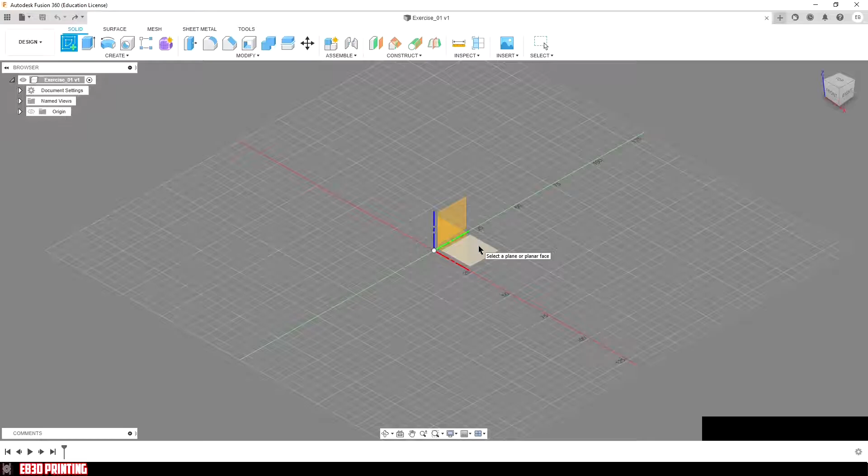So let's hop back over to Fusion 360. We're going to click Create Sketch and choose this XY plane, or top plane, whichever you'd like to call it. We'll click Create Rectangle, change it to a center point rectangle, and select the origin. We'll type in 100 for the length and 63 for the width, then click OK.

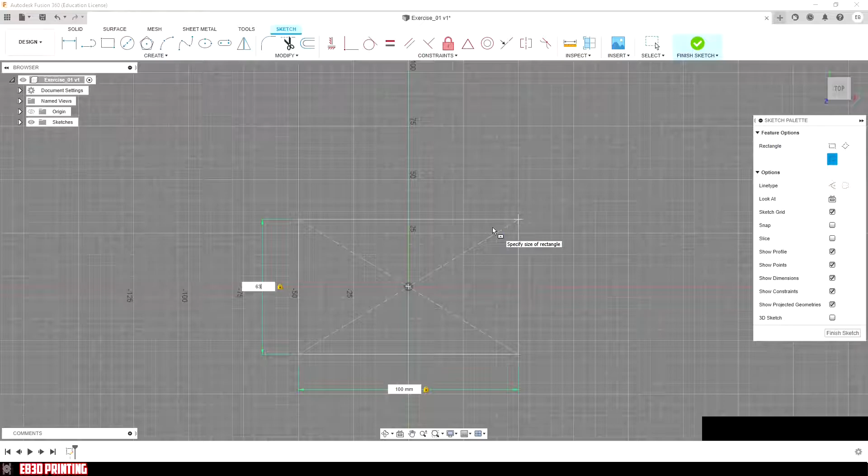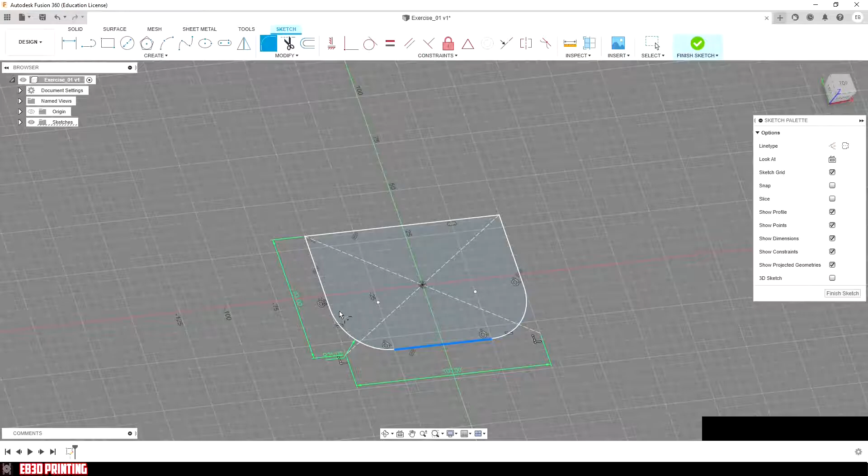Next, we're going to put two fillets on here. We'll select these two lines, then these two lines, and change the radius to 25. We'll make sure two lines are selected so it's tangent with all four corners here, and click OK.

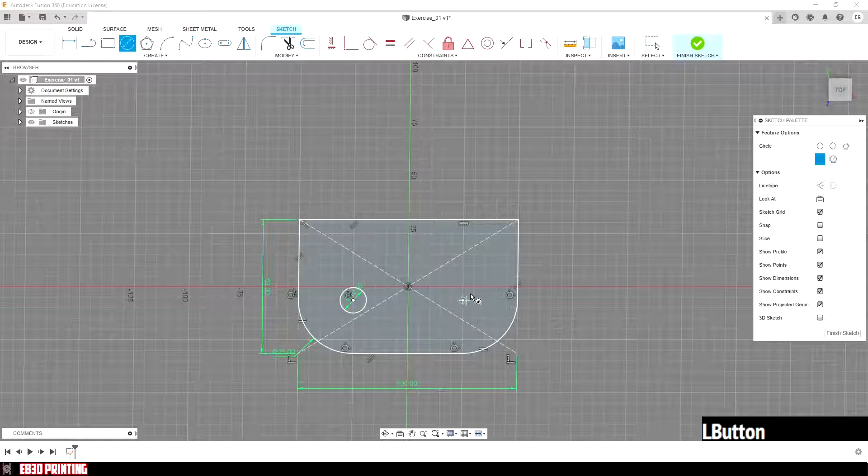Next, we're going to put our two 12 millimeter circles in. These are concentric with the fillets, so we'll type in 12 here, right click, repeat center diameter, and click 12 millimeter again. There's another way we could do this: we could delete this dimension, select this circle, and hit equal. Now they're both 12 millimeters.

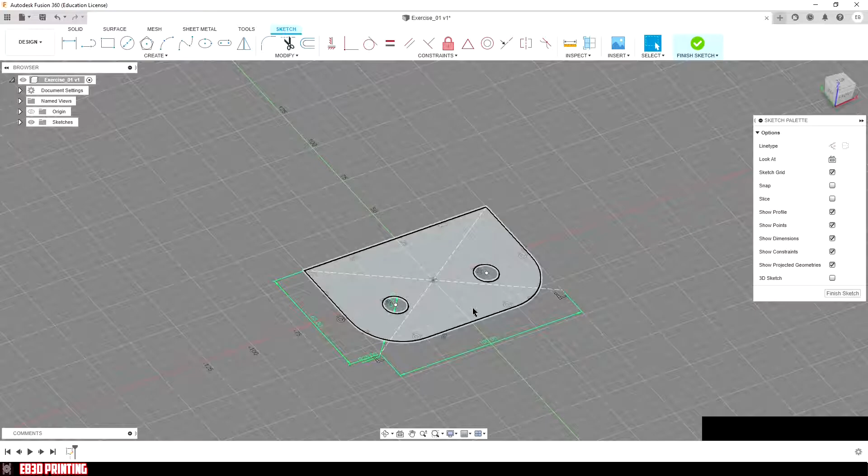Next up, we're done with the base, so we're going to extrude this. We'll hit E, the shortcut for extrude, select the outline of the base, type in 12 millimeters, and click OK.

So now our base is done. Let's go back over to the sketch and see what's next.

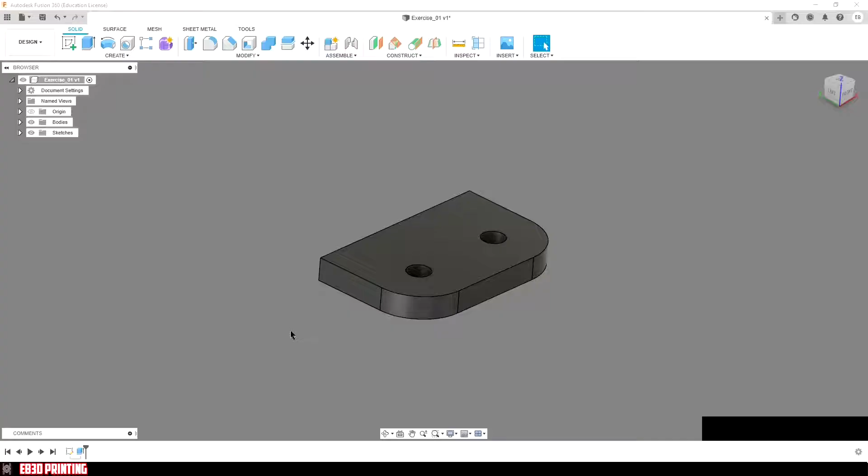Let's go back over to Fusion 360. Here we're going to rotate the part around, select this face, and create an offset plane of 0.

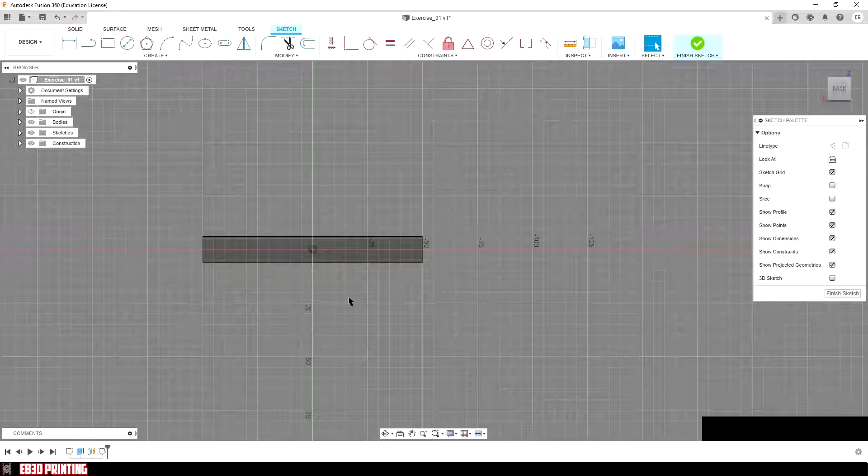Now we're going to create a sketch on this plane. We're going to select this top line and this line, and hit Shift P, which is my shortcut for project. If you don't have a shortcut set up, select these two with Shift left click, go to Create, Project Include, and hit Project. Now we have these two lines projected onto the sketch for reference.

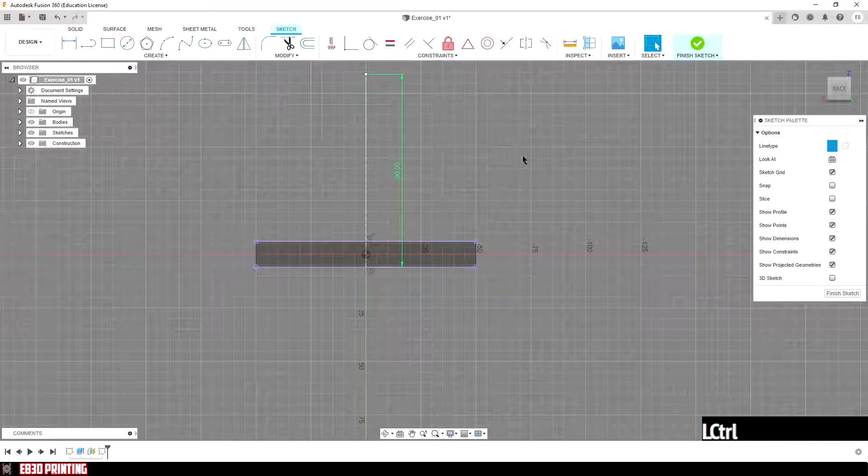Now we're going to create a construction line, making it 90 millimeters tall for the center point of the circle. Next, we'll create two circles, unclicking construction. The first one we'll make 50, and the second one we'll make 25. So now we have our two circles drawn.

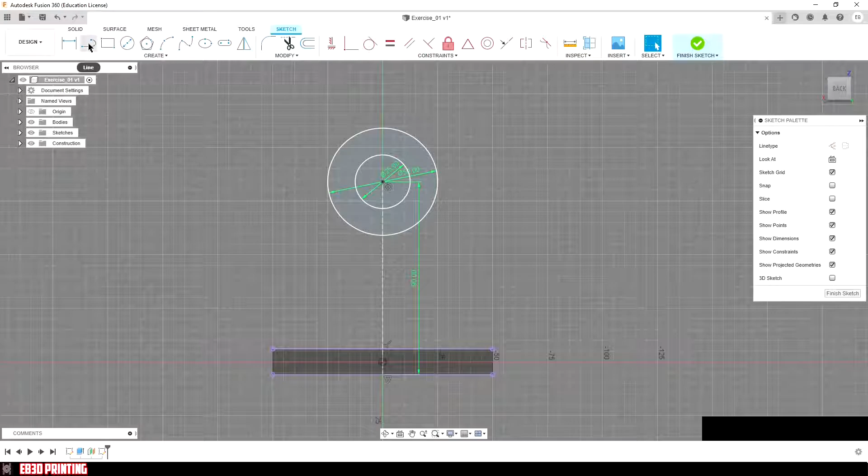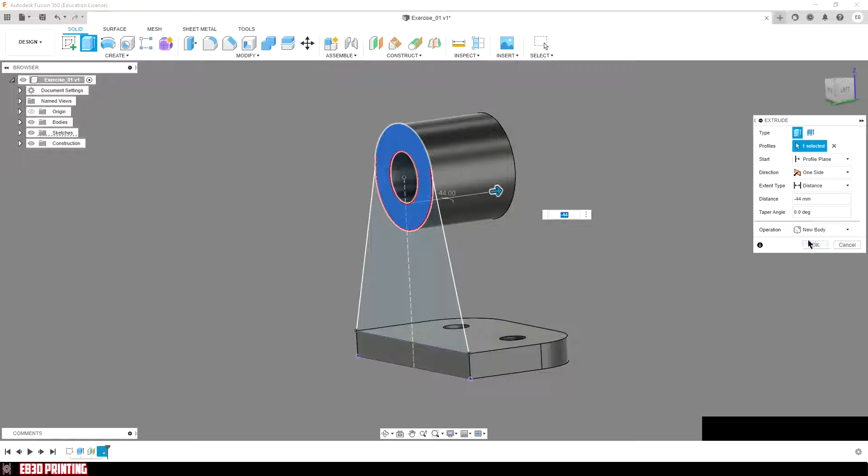We need to make two tangents for the ribs. So we have one there, repeat line, one over here, go up until it's tangent. Now we'll hit E for extrude. This circle we're going to extrude -44 for the depth of the circle, create a new body, and click OK.

Next, we're going to show the sketch again, hit E for extrude, and use -10. We'll make sure it's on Join, so it joins both the top body and the lower body, and click OK.

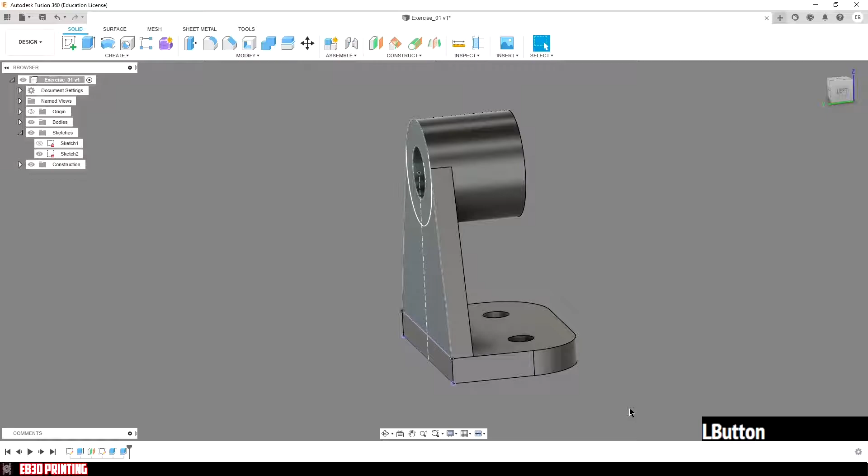So that's it for the vertical part. Next we're going to do this front rib here. We'll show the origin, click on this plane, which is the ZY plane, and click Create Sketch.

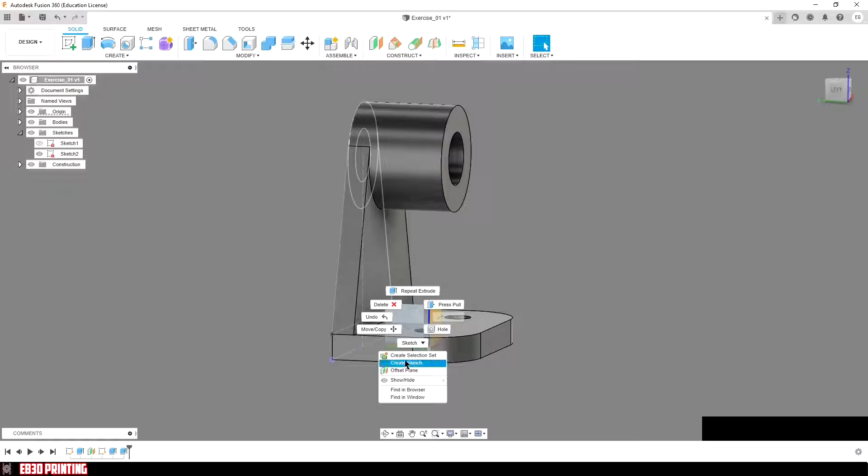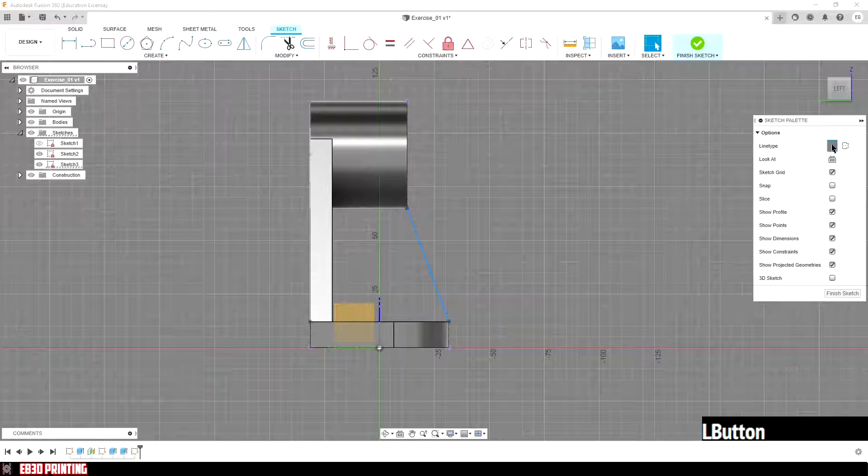Again, we're going to project features, projecting this line with Shift P. We'll turn these into construction and click OK. After that, we'll click Line and connect these two lines. If it's still construction, the easiest way is to click the line and unclick construction. Now that we have our reference line in place, it's fully constrained.

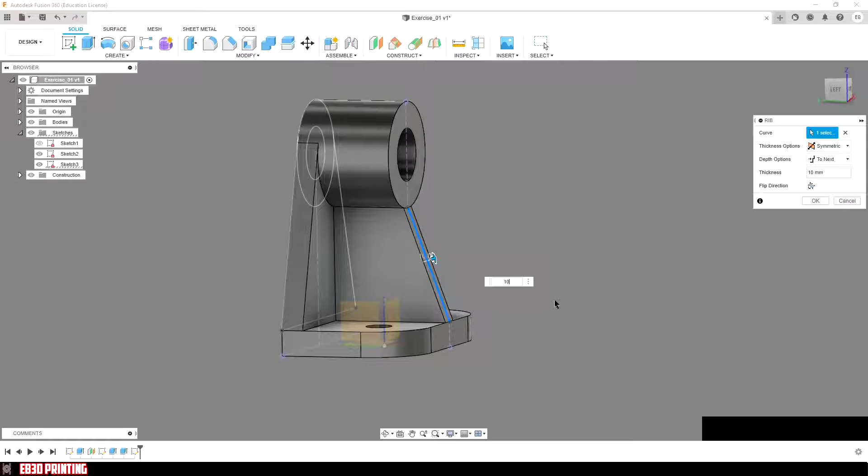We'll go over to Solid, hit the drop down of Create, and click on Rib. For the curve, we're going to select this line here. For the thickness, we'll do 10, and make sure it's set to To Next. As you can see, it's projected.

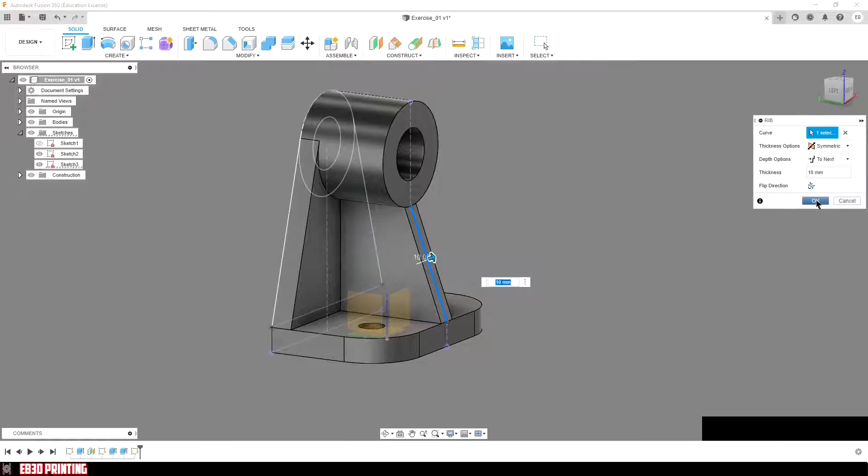The next thing we want to do is make sure it's symmetric. One dimension will change the direction it's in, and then we make sure it's symmetric. So there we are, and now we're done with the rib.

Let's go back over the sketch and see the next item we need to add. The next thing we're going to work on is this top rectangle here that attaches to the top cylinder. We have a width of 12, a width of 12, and then a gap of 3, so that's 27. For thickness, we have a total depth of 32. And for height, we have 48 from the center point of this circle.

We have a 12 millimeter circle here that cuts through both parts of the rectangle, with a 16 millimeter offset from the front and a 12 millimeter offset from the top. These rectangles have a 6 millimeter offset from the front of the circle. So let's go back over to Fusion 360 and design this rectangle.

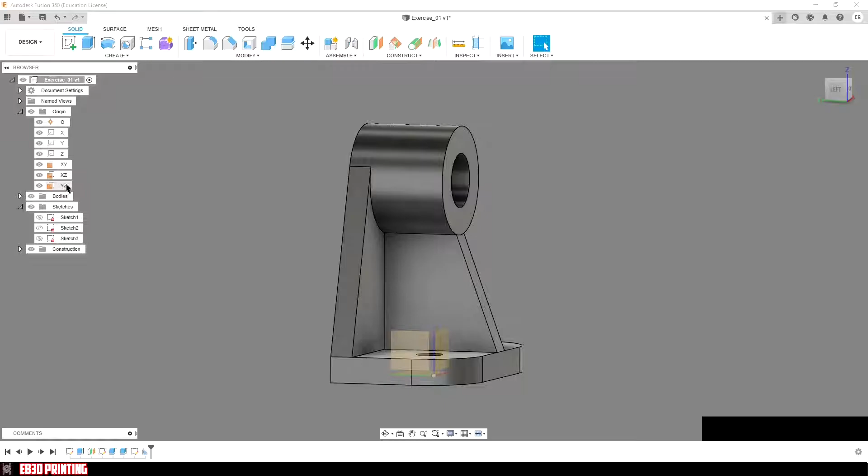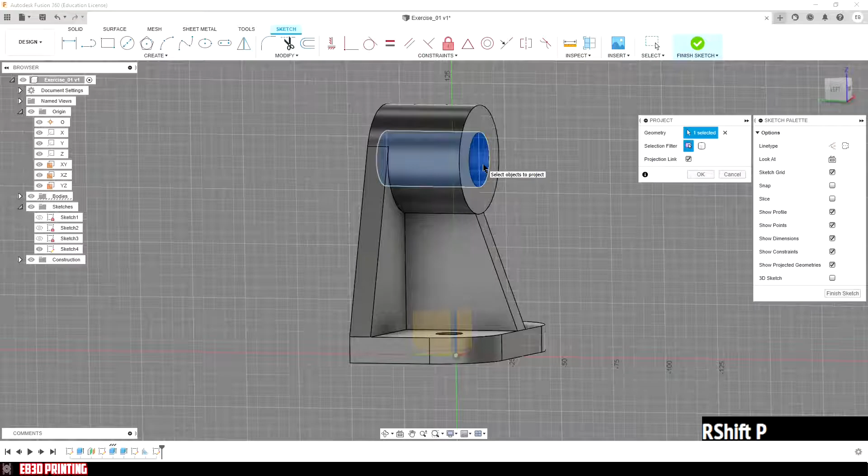Back over here in Fusion 360, we're going to hide this sketch. Next, we're going to select this YZ plane and create sketch. We'll center our part. The first thing we're going to do is make a reference for the axis of this center cylinder, so we'll highlight and select this center cylinder, hit Shift P, and click OK.

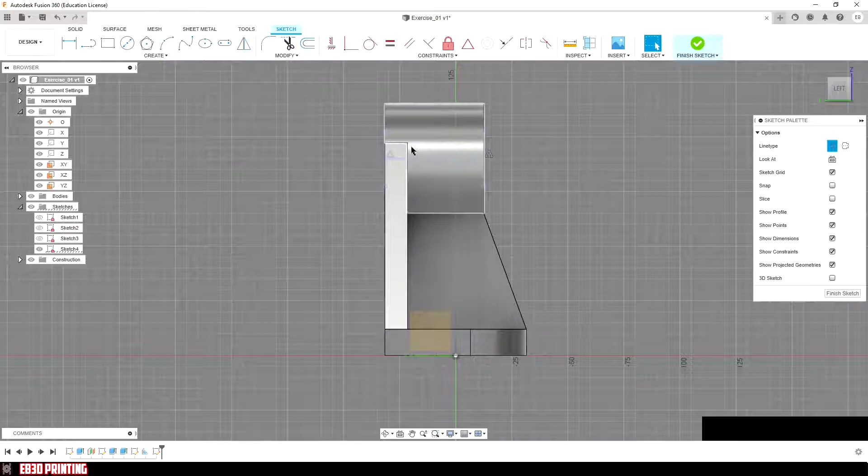Next, we're going to create a construction line from the midpoint of this line straight across to the midpoint of that line. This construction line acts as a reference point for the axis of the center cylinder. So we'll select the left plane, click this cylinder, hit Shift P again to project the cylinder onto the sketch, and click OK.

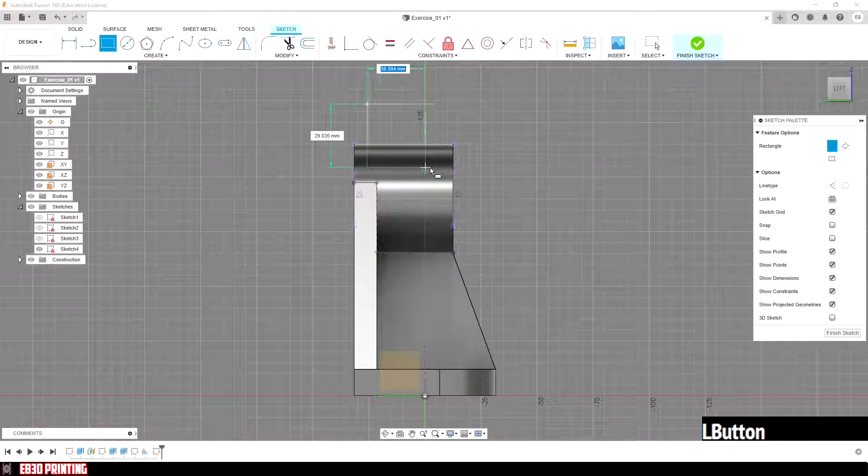Next up, we're going to uncheck line type of construction. We're going to click 2-point rectangle and draw a 2-point rectangle here. The first dimension we're going to do is make sure this is 32 millimeters wide. The next dimension we're going to do is go from this center point here up to the top, and make sure this is 48.

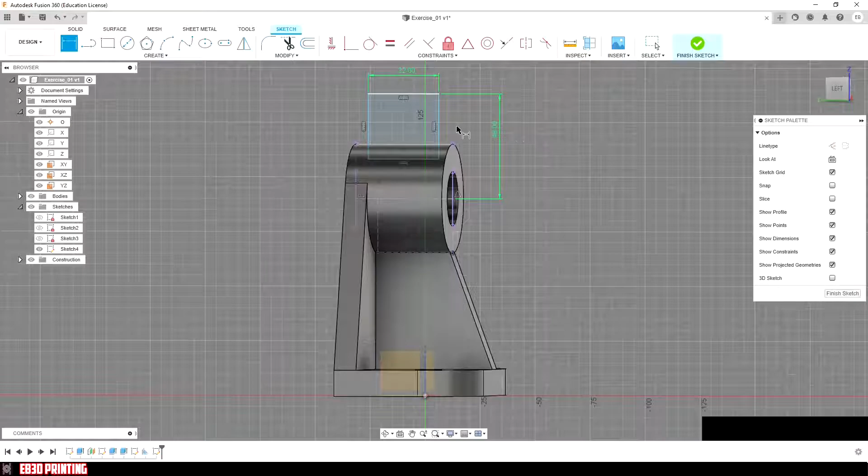Okay, so now we have that set up. Next we're going to make sure this dimension right here is 6 millimeters. That means our rectangle is now fully defined.

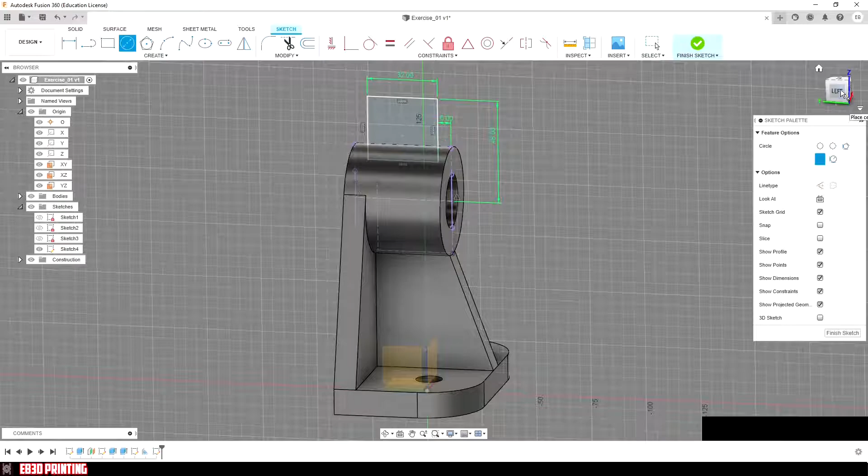The next thing we're going to do is create our circle cutout, cylinder cutout on this rectangle. This is a 12 diameter circle. For reference points, we're going to dimension this as 16, which is the midpoint. Then also dimension this. We're going to hit D for our dimension again, and dimension this to 12 millimeters.

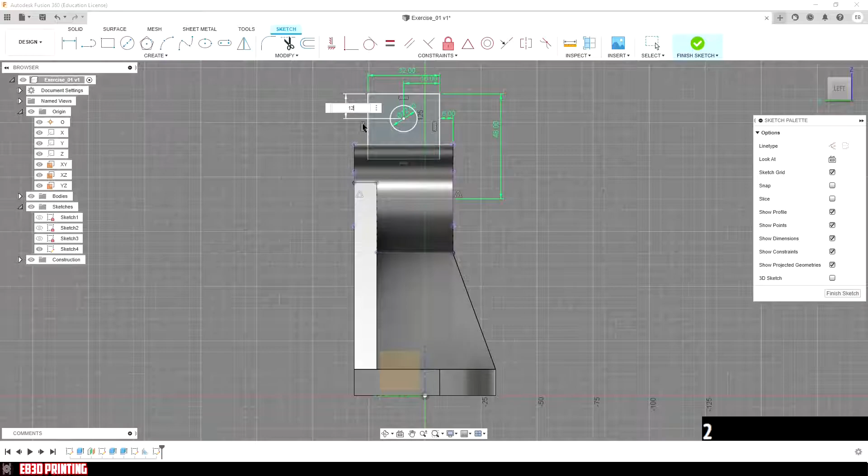So now that we have our center rectangle done, we've got to remember we're going to extrude this. We're going to make sure it's symmetric, select whole length, and this is going to have a 27 millimeter width. Now it's going to cut because we have it dimensioned down into the circle.

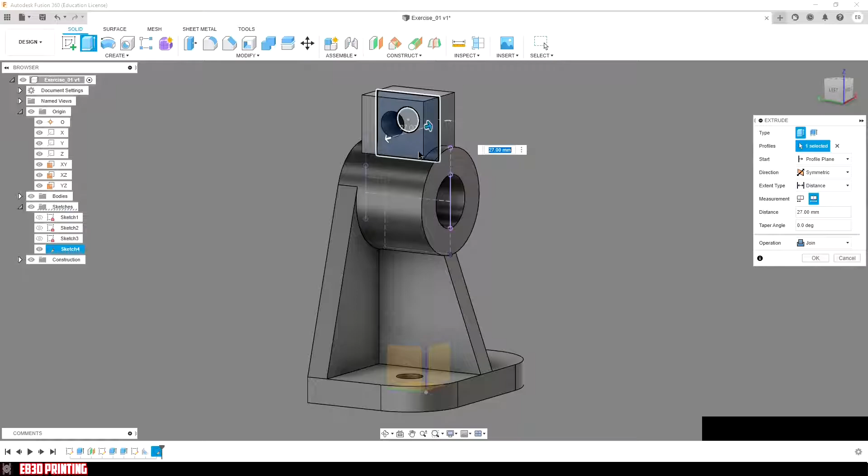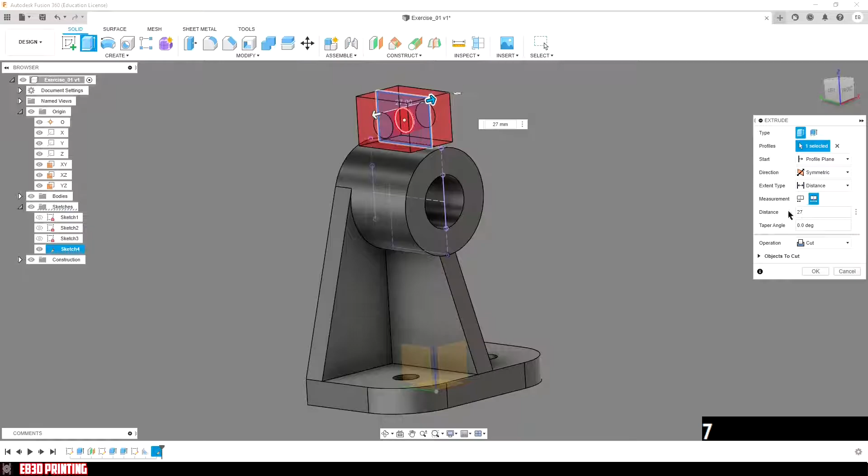The reason we have it dimensioned down into the circle is so that it actually joins instead of having a lip here after we extrude it. I'll go back through and show you: if we bring this up with a coincident constraint of this with the top of the cylinder here, when we extrude this again symmetric, whole length, 27 millimeters, and then we hit join, you can see there's a lip here, and we don't want the lip in the final design.

So what we're going to do is just bring this down a few millimeters. We can dimension this so it's fully constrained. We'll make this 5 millimeters for a total width. Now our sketch is fully constrained.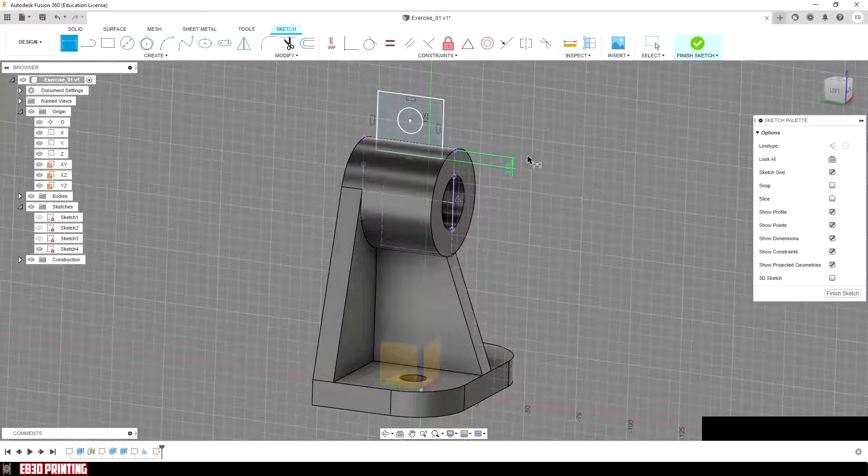Go back over here, hit E. Again symmetric, distance, whole length, 27 millimeters, and then we're going to hit join. And that is our top rectangle done.

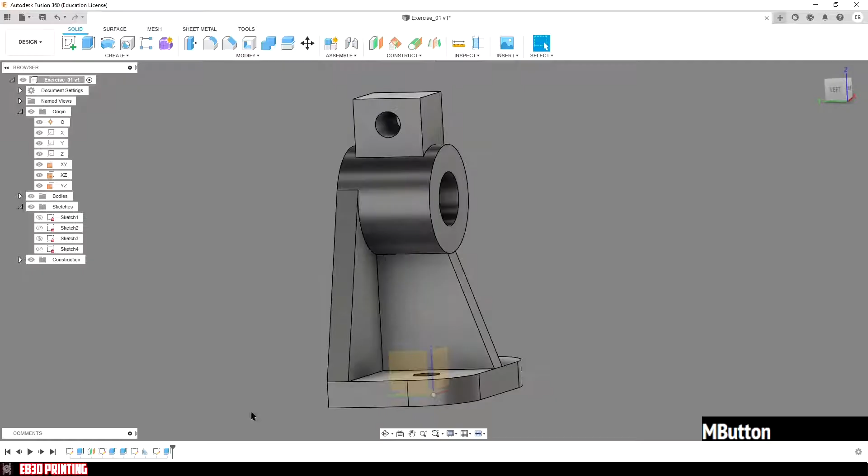So the last part of this sketch, we'll go back over to see. The last part is we're going to create this 3 millimeter gap here. It's very simple. We're going to go back over to Fusion 360 and get this done. Back here in Fusion 360, we're just going to select this front surface and click Create Sketch. It's going to center for us.

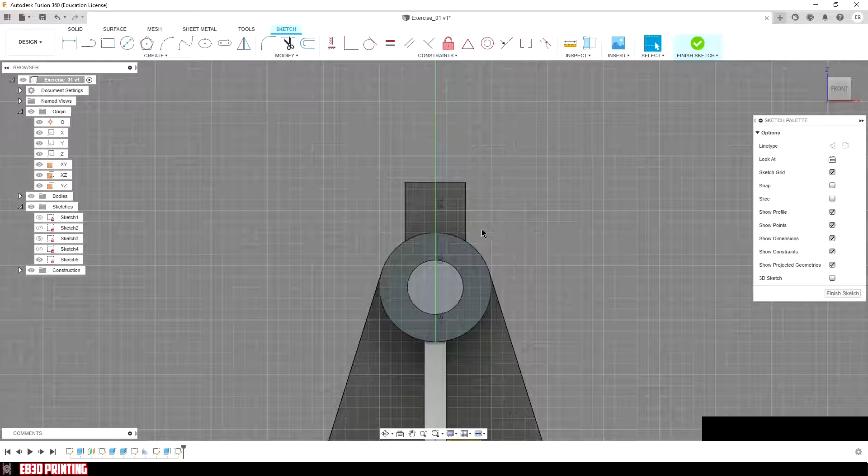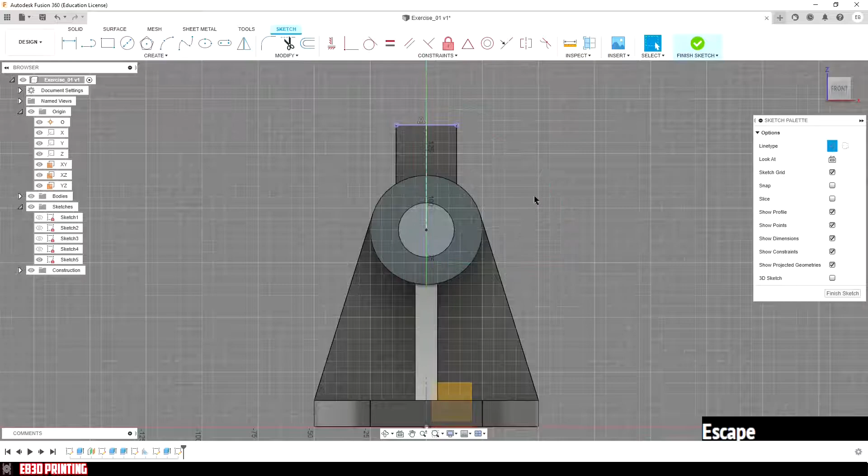What we're going to do is reference this top line by projecting it, Shift P, and here's a project. Next thing we're going to do is create a construction center line from this top line down to the center point of this circle. Then we're going to hit X to unselect construction, and create a 2-point rectangle from this top reference line to the axis of the center cylinder.

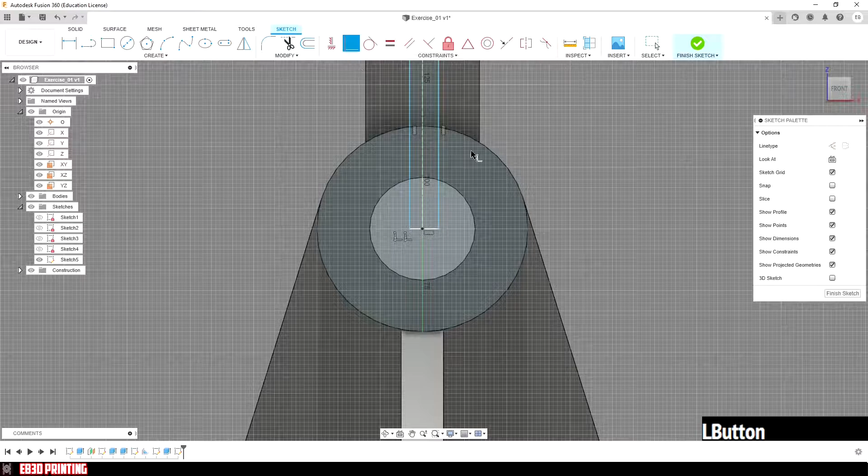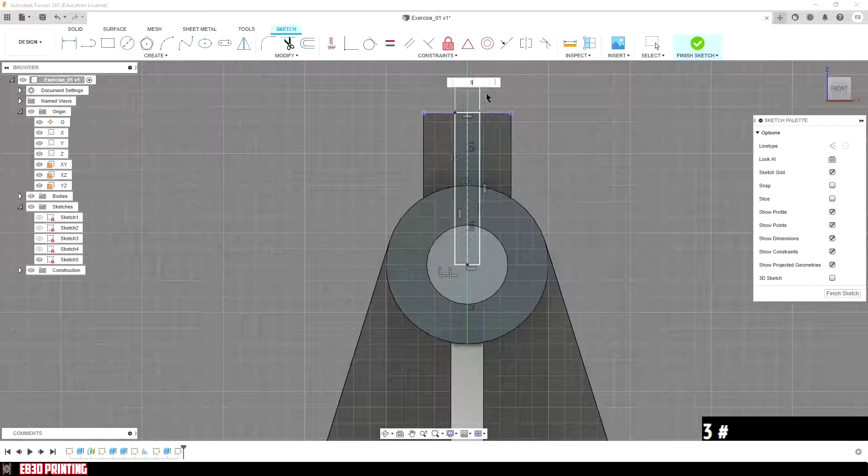We're going to select this point and this bottom line here, and make this coincident so that it's fully constrained. Then we're going to select this line, this edge, and the center construction line we put in earlier, and hit symmetry. That'll make these two distances between the center line equal. Then we're going to make this a total width between these two lines of 3 millimeters. So now our center gap is fully constrained.

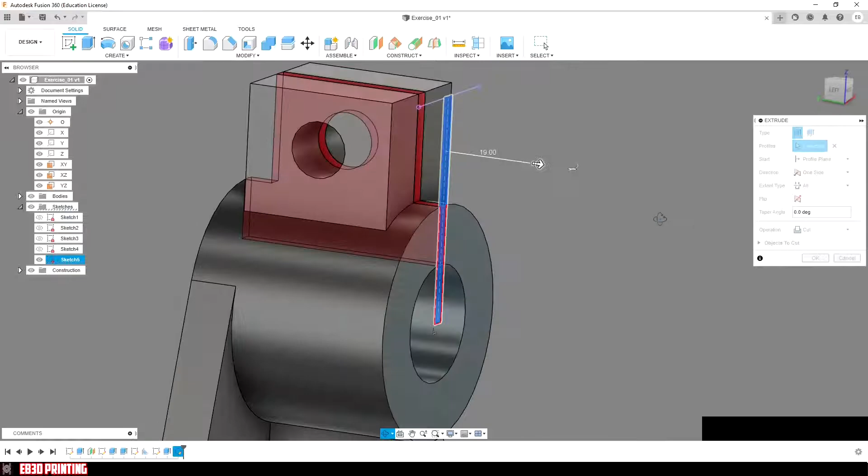Now we'll hit E, select this, select this, select this. We'll hit distance, go through all, and make sure it's flipped so that it cuts completely through the object, then select OK. We'll select home here, and that is our 2D sketch completed into a 3D object using Fusion 360.

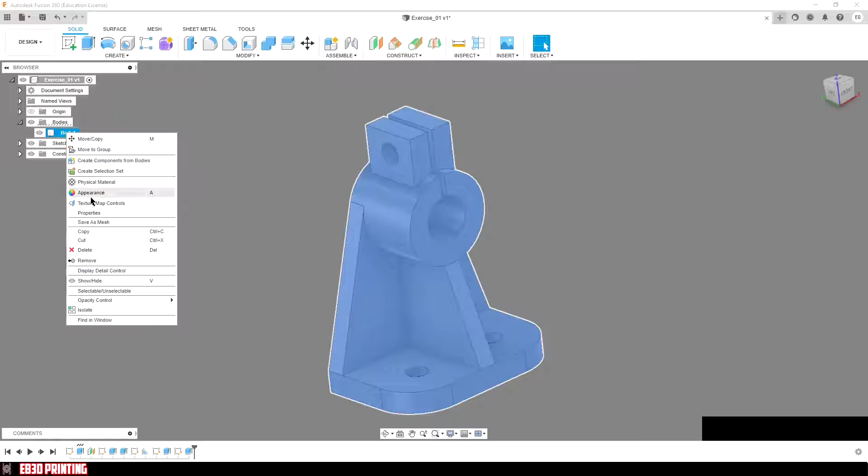Now we can go over here to bodies. We can add appearances if we want to. We'll go down here to metal, and I like brass - we'll make it polished brass. Bring this up here, select the feature, and there is our object in polished brass.